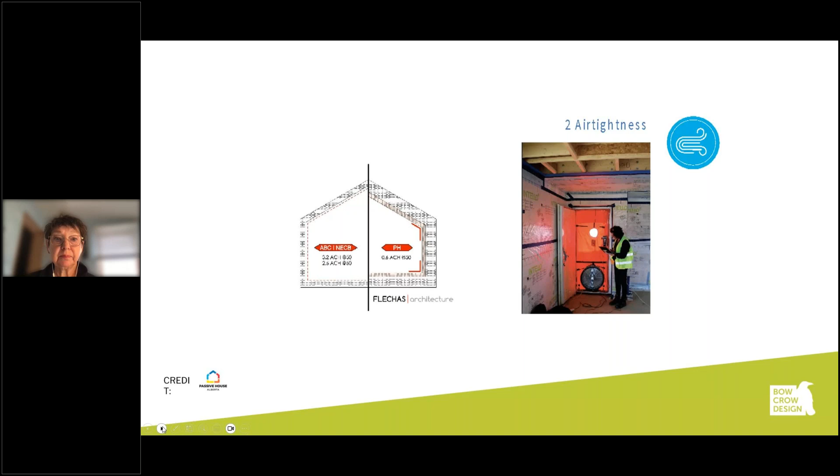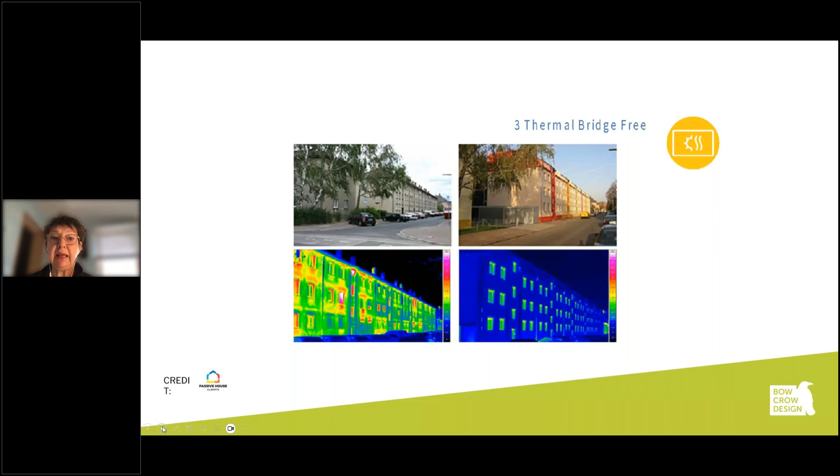We work on thermal bridge-free construction, meaning warm parts of the building are not sticking through to the outside. This is a thermograph image of the same building before and after a retrofit, where at the beginning there was a lot of thermal bridging, and in the end, a lot less.

And we work on windows and doors being very good and appropriate for the climate that they're in.

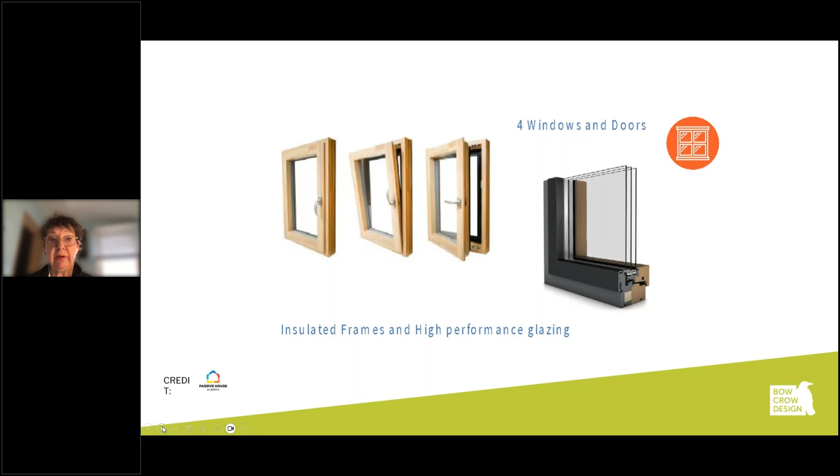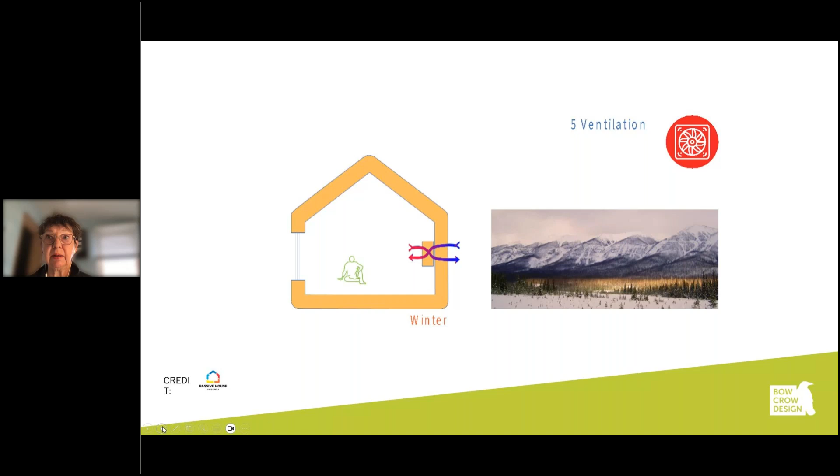We make sure that this airtight building has some active ventilation so that it provides fresh air for the inhabitants and a comfort level that is extremely healthy. All of these things work together to make a more comfortable building.

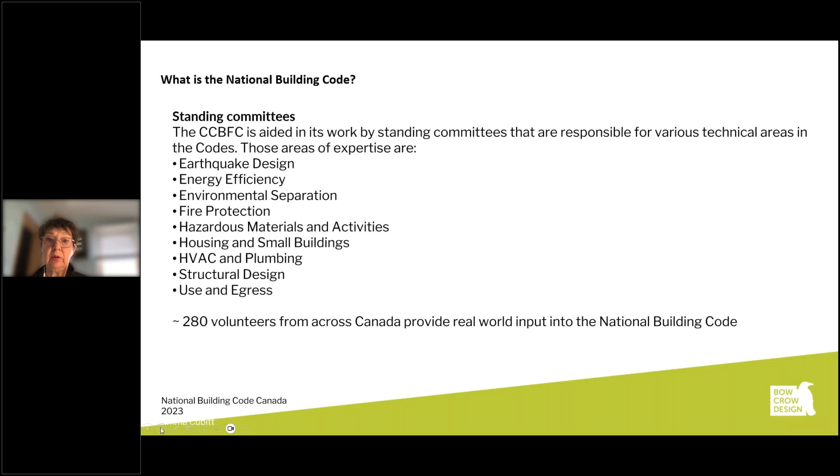The first building code was developed between 1939 and 1945, and it included not very many different aspects of building, but it was needed, and it was developed alongside international building codes at the time, understanding that there needed to be a basis for building around the world.

The most current document, issued in 2023, is about 1,570 pages, grown quite a bit, in 2 volumes with 8 parts - the first volume has 2 parts, and volume 2 has a couple of parts - plus appendices and indexes that are part of the whole building code document. It is not a simple document to go through.

But it forms the basis of most building design in the country, and the idea is that we would have a building code that's consistent across the country.

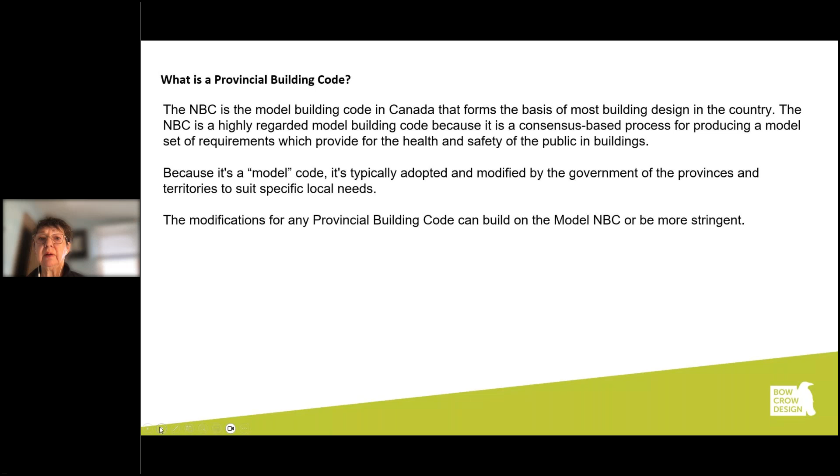Each province is required to adopt the current building code in Canada, and they are allowed to take that model code and, as a province, add to it and create their own building code, which is at the very least the same as the model building code, but must be more stringent in any additions.

One thing I forgot to mention, and I think I brought that to attention in one of the slides earlier, the National Building Code of Canada and also the NECB are minimum codes. In other words, you can't build to a lesser quality than what's described in the National Building Code or the National Energy Code for buildings.

So now we're going to talk about the history of the National Energy Code. It is not new, although a lot of people don't know much about it, but it's been developed since the 1970s, back when we thought we were going to run out of oil. Not that we were using too much oil, but that we were going to run out.

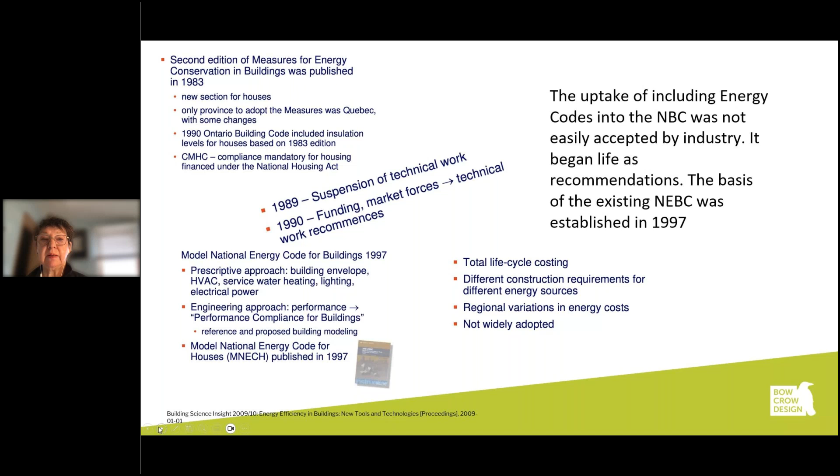The uptake of the energy codes was not really wanted or accepted by industry, and it had a lot of hiccups. The basis of the existing National Energy Code for Buildings was established in 1997, so that's a few years ago.

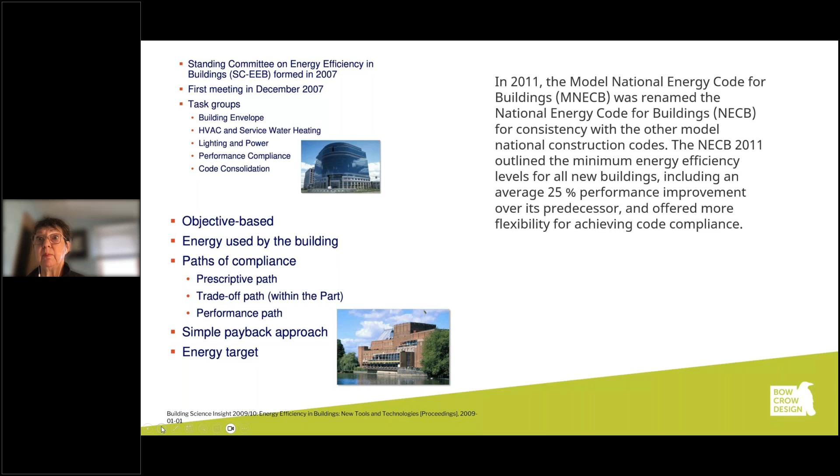The 2011 Model National Energy Code for Buildings was renamed and shortened to the National Energy Code for Buildings for consistency with other model national construction codes. The 2011 code was intended to be 25% better than the code before it, but it was still not enforced. It was offered as something that could be used as a model.

In 2015, there were 90 new changes. The idea of the 2015 NECB was that the efficiency measures explained and laid out in it are 10 to 14% more efficient, with the aim of helping to reduce energy consumption, save on energy bills, and reduce peak energy demand, which many people have heard about. Peak energy demand is the thing we fear the most for electrification.

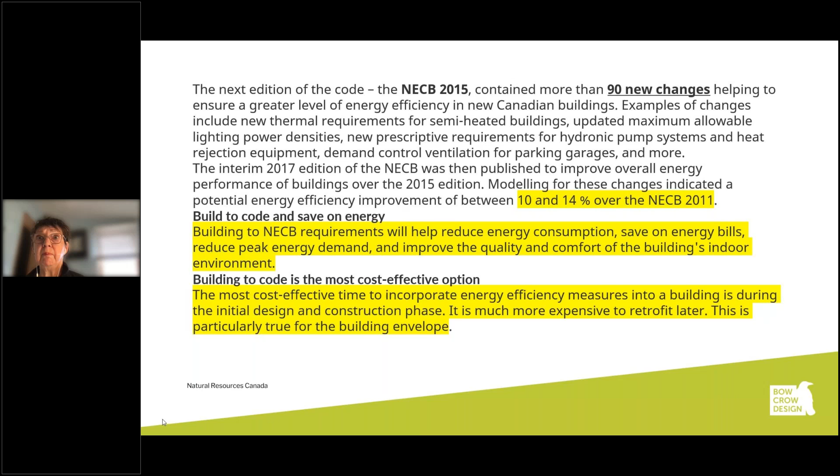The idea is that we want to be sure that buildings are not the source of energy failures in our provinces and in our country. The most cost-effective time to incorporate these energy efficient measures is when you're building a building, not later. This is particularly true in terms of the building envelope. Once you put a building up, it's pretty unlikely you're going to make any significant changes over many years, decades likely.

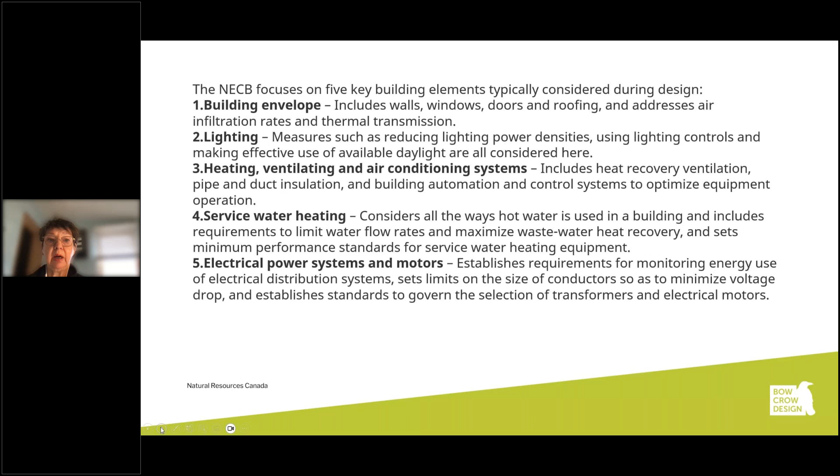So the NECB, what is it exactly? It focuses on five components: the building envelope, lighting, heating, ventilation, and air conditioning systems, service water heating, and electrical power systems and motors.

The 2020 edition has an addition to the Energy Code that is something new-ish. The province of BC has certainly been working on this for the last 10 or 15 years, but the new code is establishing tiers that will be developed over time.

Tier 1 is where the National Building Code or the National Energy Code is at this moment, but the next version will be at Tier 2, 25% more efficient over the target of Tier 1. Tier 3 will be 50% over the baseline target, and Tier 4 will be a 60% improvement over the baseline target.

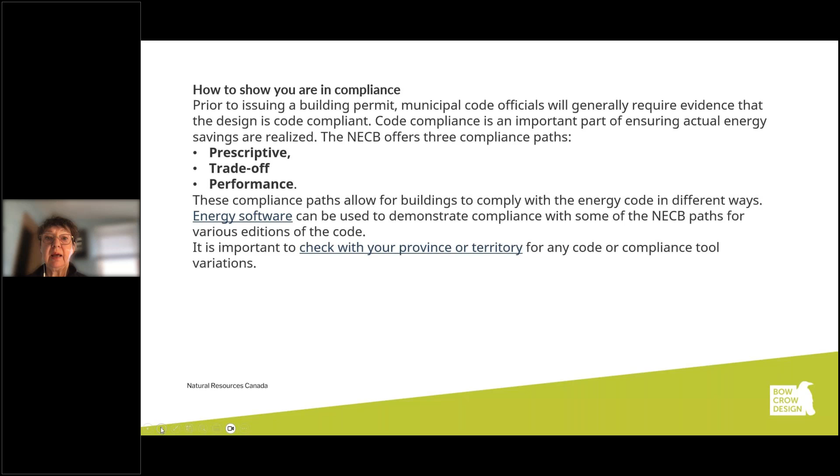The ways that you show you're in compliance to the jurisdiction when doing a building permit or designing a building come in three ways: prescriptive, trade-off, or performance. Proof of these is required for building permits across Canada.

In terms of code harmonization, the adoption of the National Building Code and the National Energy Code for Buildings is important. It's important that all provinces adopt and enforce these codes to ensure there are no particular benefits to building worse in any particular location in Canada, and that it prevents inconsistent model code adaptations, which can lead to barriers to trade, investment, and labor mobility within Canada. That's why harmonization of the codes across Canada, and the consistency, is important.

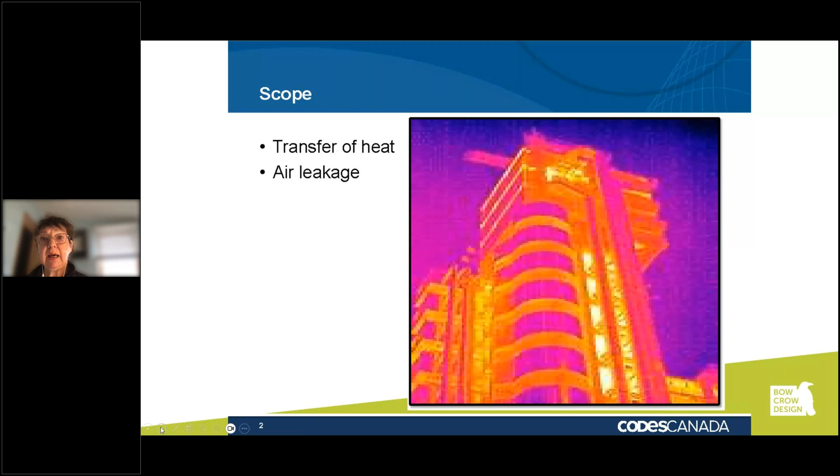So building envelope - remember we talked early on about thermal bridge modeling, thinking about the transfer of heat and air leakage from the building to the outside. The way we do this is by thinking of the means of separating components in the conditioned space from the unconditioned space and the exterior air and ground, ensuring that the condition temperatures are differing by more than 10 degrees Celsius at design conditions.

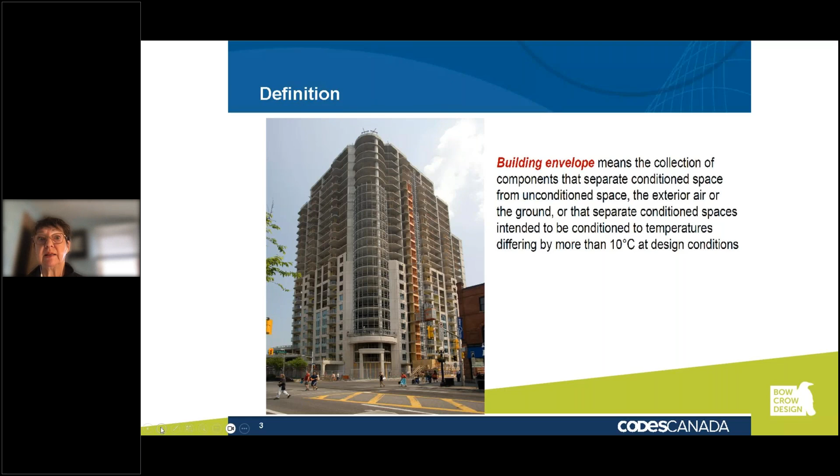That building, by the way, is a pretty poor example of a good building envelope. The compliance options are prescriptive.

There's a prescriptive path, which is usually a checklist, where you're just making sure that your building complies with the things on the list. Sometimes that's not good enough, or you want to try something new, or you have predetermined equipment - in that case you use a trade-off path, and there are tools provided by NRCan for the calculations. The last way is a performance path, whole building modeling, where you think about the whole building as a whole. That requires energy modeling, and that's where you can tweak the performance of the building so it meets the requirements of the NECB through unique building structures, unique equipment, and unique building methods.

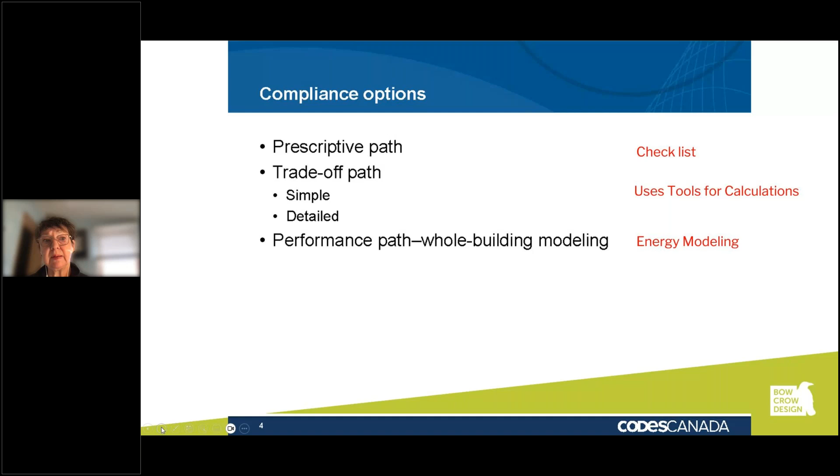So one big deal in terms of building envelope is the continuity of insulation. It's not just insulation, but making sure that insulation is continuous.

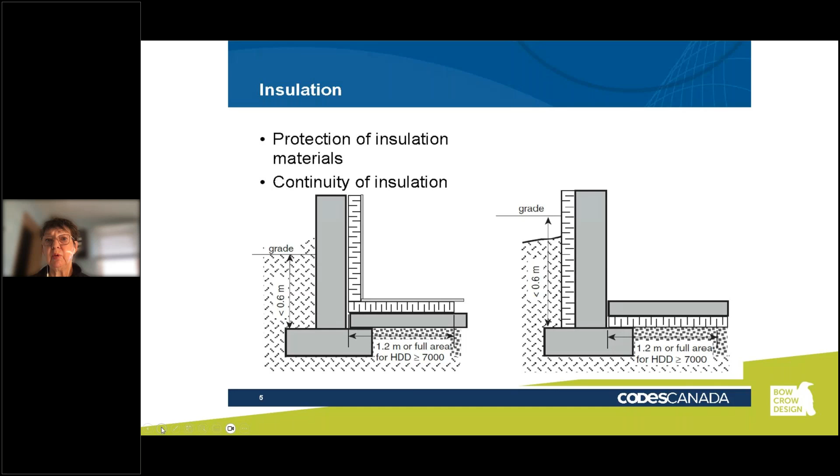In this slide, the first example shows continuity of insulation, where insulation is continuously in the same location and is protecting the outside of the building from environmental forces. In the second example, which might seem like the same thing, it is not, because there's a disconnect between the insulation and the ground and the outside. So there's some protection, but there's also heat being lost to the ground in this case, and through the stem wall and footing.

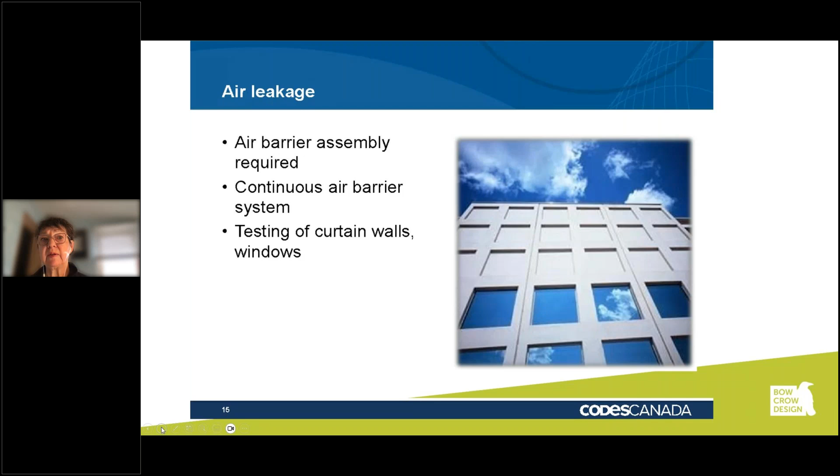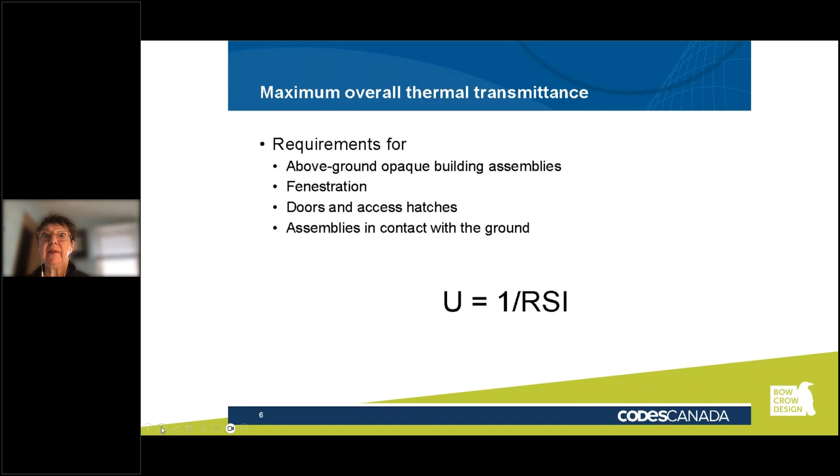Something that's used often in the building code is called a U value, which is pretty confusing. We all really know what an R value is - RSI is the metric version of R, and you can get a U value in imperial or a U value in metric. But if we know the RSI of a product, we can get the U value by dividing 1 by the RSI value.

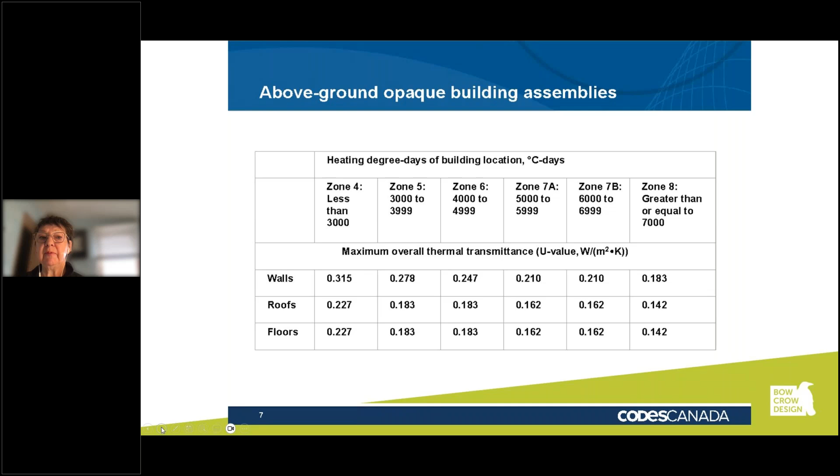So that's just so you can look at this chart and say, what is this? What is a U value and what is watts per meter squared Kelvin? We don't really know - you don't have to know, you can do a little bit of math to figure this out, I guess. But what we have here laid out for many components of the building is what's required from zone to zone in Canada.

For where I am right now, that's zone 7A, which is most of Canada. Some parts of Canada are in zone 4, not very much, but there's a lot of people living there. Zone 5 and 6 cover some of the southern parts of Canada, but most of Canada is zone 7A, 7B, and zone 8.

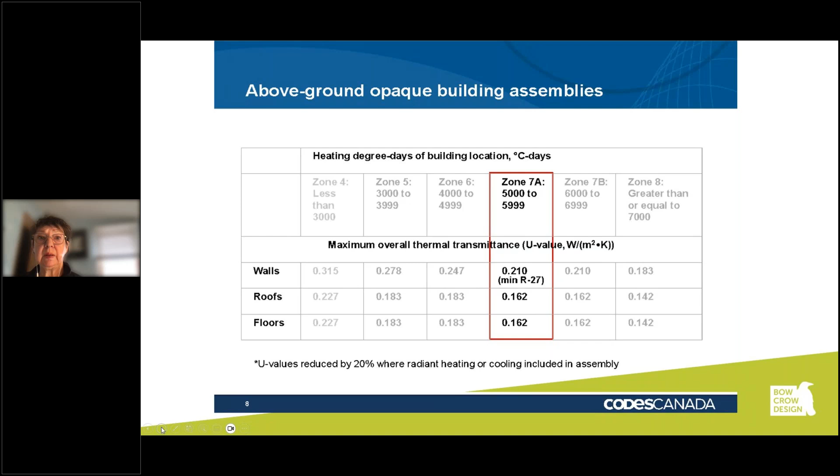The degree days is another term that's used, meaning the number of heating days that require heating. That is used universally as something that identifies what kind of zone the building is in.

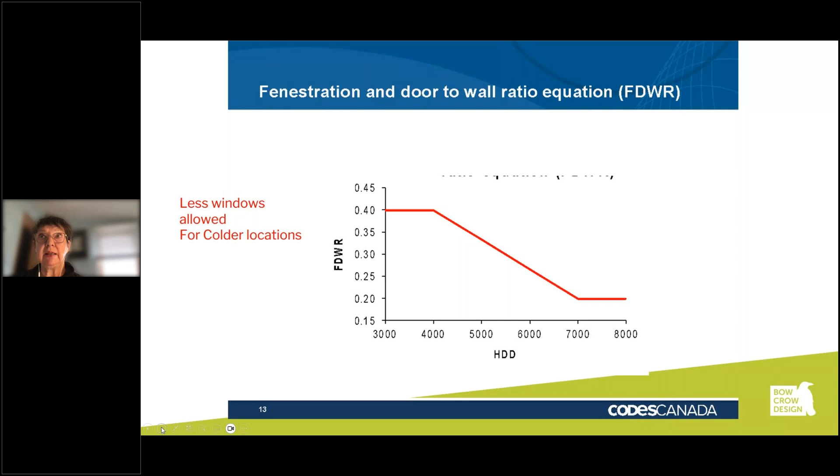Next, this is about fenestration - by the way, fenestration is another fancy word for glass or windows. In the National Energy Code, there is a requirement to have fewer windows in a colder environment. So heating degree days is at the bottom, and the number of windows allowed in the building, as a percentage, is lessened as we get into colder climates, according to the Energy Code.

So the lighting portion of the NECB is the next thing that we're going to look at.

The interior lighting is calculated, and there are two methods for figuring that out.

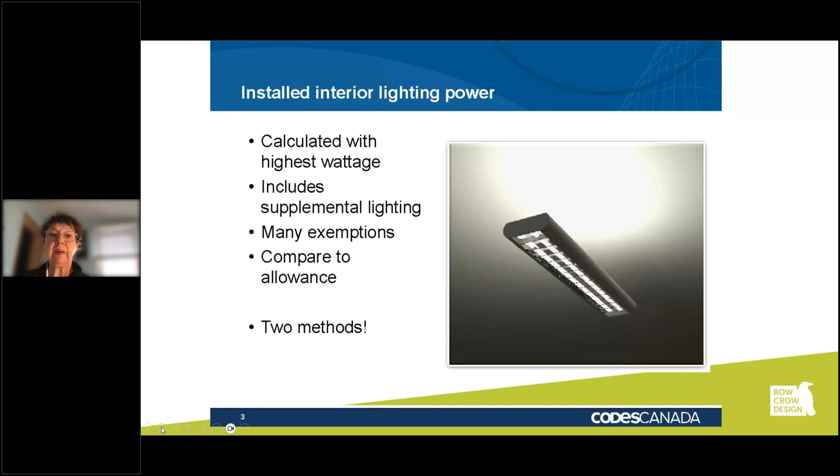That's either by building area or space by space. When considering how to meet the code requirements, sometimes space by space will make more sense in targeting lighting levels, but building area may actually make more sense for a larger building.

There are lighting tables and tools for figuring all of this out.

The scope for electrical systems isn't just about lighting. It's about all of the mechanical systems in a building, including the thermostats, pumps, heat pumps, and blowers. All of the equipment is calculated within the electrical energy used in the building.

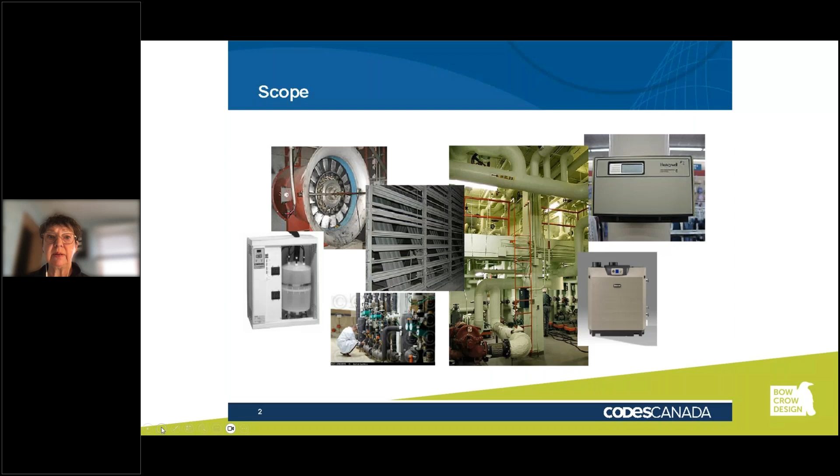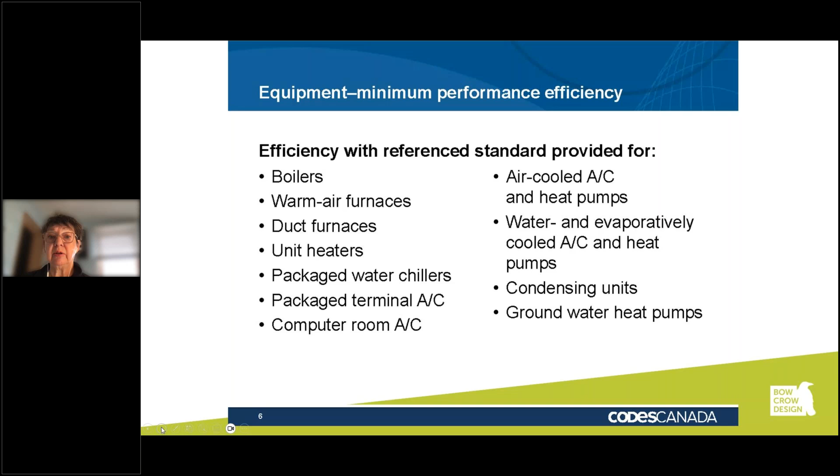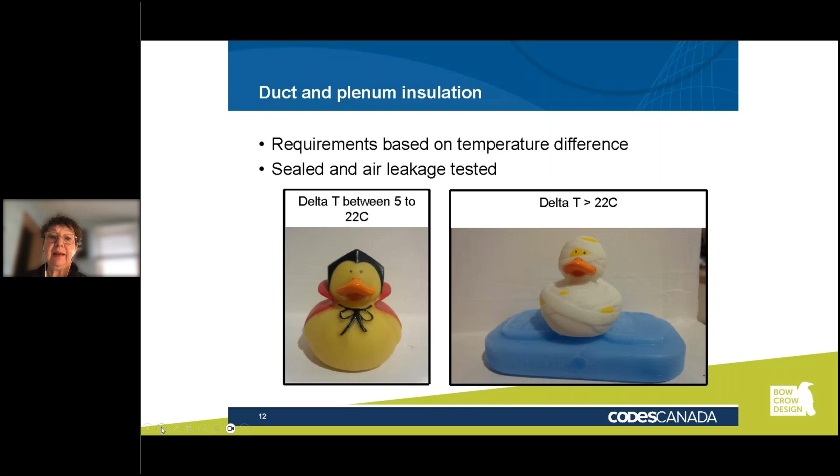With the trade-off concept, it still considers energy used throughout the system, and the tools used for the trade-off concept do include those considerations.

The system efficiency approach considers the HVAC system as a whole and is intended to permit flexibility for typical designs. It will compare against the total reference system.

In the code, a reference building is a building that's built to the previous code. What the efficiency needs to do is be better than that reference system, based on the tiered code: 25%, 50%, 60% better.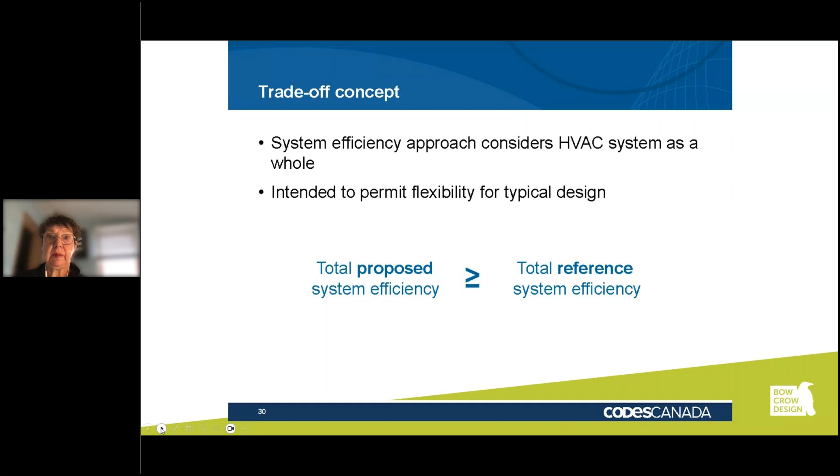We're limited in the energy sources that can be used in the energy code. Diesel is not included. The backup equipment has to meet the prescriptive requirements.

So you can't just have some small or undersized equipment that's backed up with something that is bigger and less efficient.

The equipment performance efficiency will comply with the energy efficiency regulations, and the backup equipment must comply with the prescriptive path. The prescriptive path is one of the ways of checking for the efficiency of the building, and you can also use the performance path as well.

This is the national energy code for hot water systems.

Again, this is about the proposed efficiency being better than the reference, and that is consistent through the entire code. These are some of the things we would be looking for in terms of hot water efficiency.

In the trade-off, sometimes more efficient equipment can be used as a trade-off for less efficient equipment, and you are obliged to use the tools in order to figure that out.

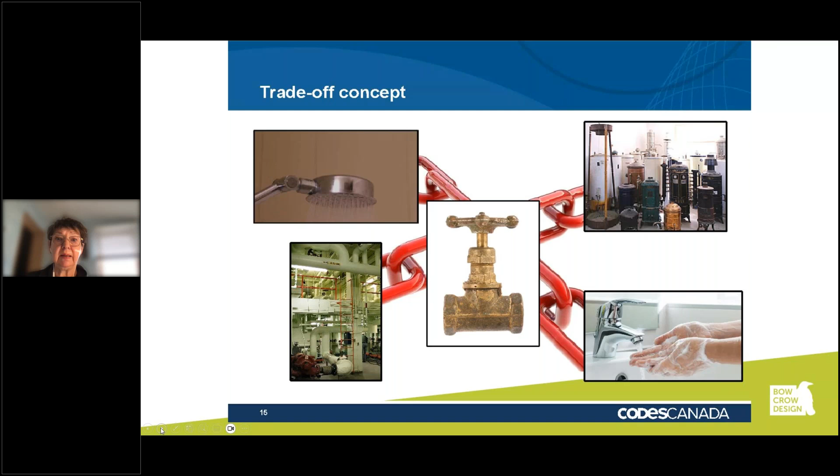For power systems, the electrical power systems that are outside are also considered as part of the whole building.

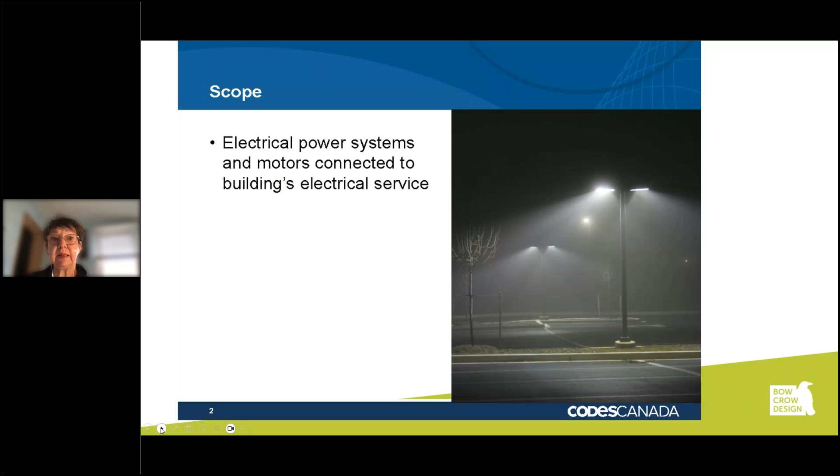For the power systems, you're not allowed to use the trade-off tools. It's just either the prescriptive path or the performance compliance.

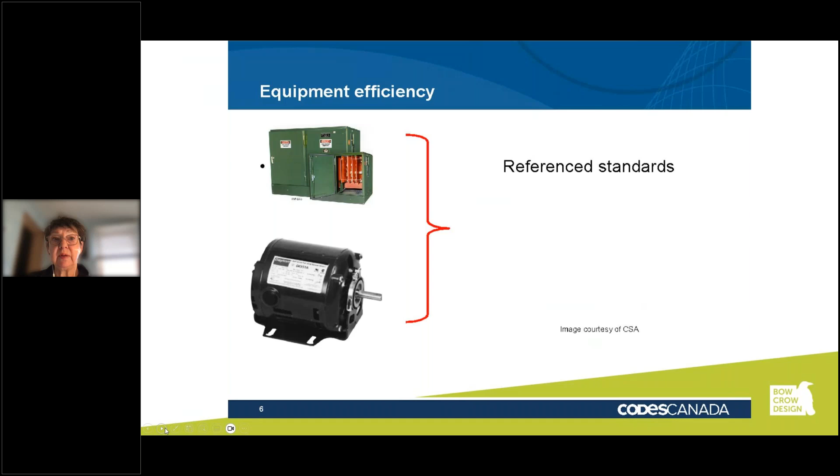Part 8 of the NECB is an outline for the building performance path.

It is the part of the code, of the National Energy Code, that you use to come up with ways of using a building performance overall, looking at the building as a whole, in lieu of trade-off or prescriptive paths. So that's a whole building energy use comparison.

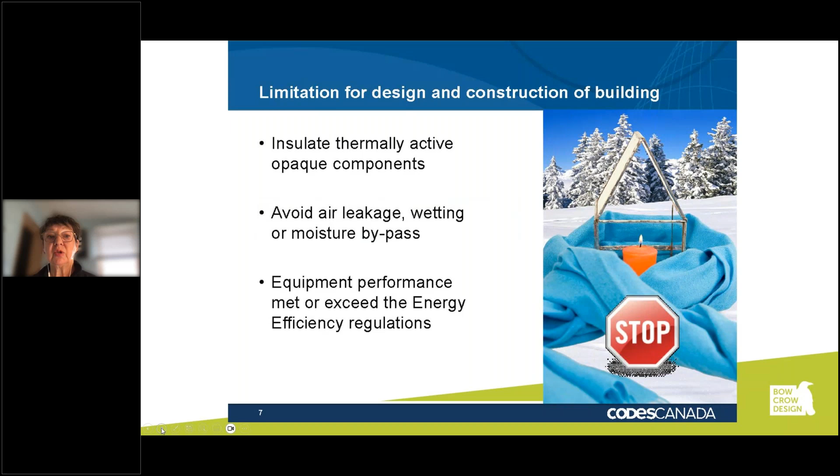So just an overview of what's required in the NECB: to insulate thermally active opaque components, meaning anything that's solid needs to be insulated well to make the building airtight, and to be sure that equipment performance meets or exceeds the energy efficiency regulations.

The tiered energy code is new in the 2020 edition. This is about tiered performance. So in Alberta, right now, the performance is at Tier 1. But in Saskatchewan, it's at Tier 2. And in British Columbia, it's at Tier 3.

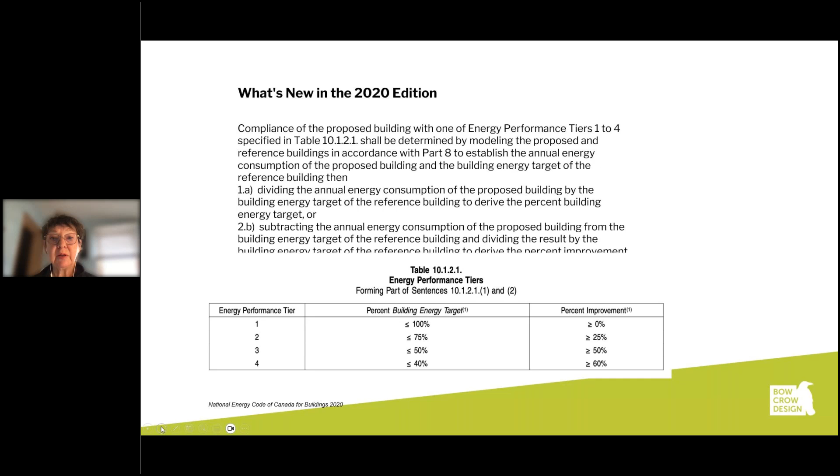The targets for compliance 1 to 4 are specified in 10.1.2.1 and will be determined by modeling the proposed and reference buildings. The reference building is the lowest possible denominator, and to be at Tier 1, you're still building at the lowest common denominator. At Tier 2, you're building at 25% better, etc.

So 9.36 is for small buildings. All of the stuff we talked about earlier is for Part 3 buildings, commercial buildings, or bigger buildings, typically bigger than 6,000 square feet. 9.36 can apply to commercial buildings or small multifamily buildings, but it's generally smaller buildings and most often residential.

The difference in the relationship with 9.36 is that it is tied completely, all of the same rules apply, except the lighting requirements are not the same. There are no lighting requirements for 9.36.

As stated earlier, these are the tiers that 2020 has included. Some things to consider for smaller buildings going forward: more efficient windows, doors, and skylights are going to be required. Minimum performance for heating and cooling equipment is required. Professional calculation for heating and cooling for residential buildings, which has never been required before, will be required.

An air tightness minimum of 2.5 ACH at 50 pascals, new set points for indoor air temperature for energy modeling, and new hot water usage numbers for energy modeling, and the tiered energy code. So every province can elect to be at whichever tier they want at this point. And as time goes on, the next building code, it'll be the next tier, and the next building code after that, the next tier.

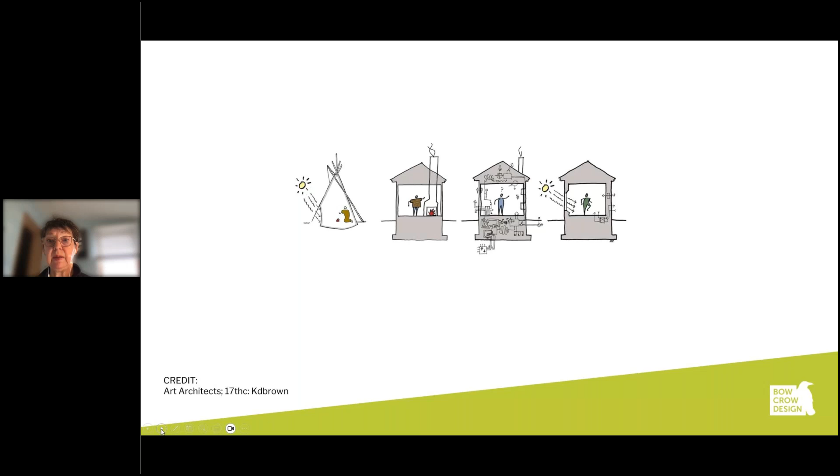It's a big change, a big way of change in thinking. But by making these changes and doing them incrementally over time, people are getting more used to the idea of incorporating these changes. Building stock will not be the third largest emitter of GHG emissions in Canada.

By the way, they're bigger emitters than all of the gas vehicles in Canada. How can the NECB benefit the Indigenous communities and associations, communities, and infrastructure projects? So this is where we were headed for this presentation.

So in my mind, sustainability is part of two-eyed seeing, and what that means is that both cultures are meeting together, and the meeting together part is where the realization is that you can't just impose things on the environment, you can't just impose things on people and expect that to work out. Thinking about buildings as a whole, and thinking about their place on the planet, and thinking about their impact now and their impact in the future, is an Indigenous way of thinking of anything.

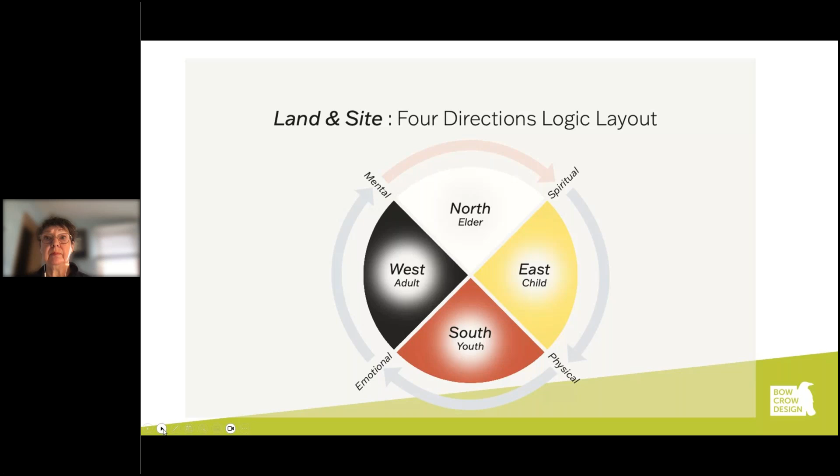Low carbon materials and natural materials are something that is not enforced and not really mentioned in the Energy Code now, but they are something we will be considering and have to consider going forward, because building buildings using a lot of high GHG materials, or materials that have a huge embodied carbon or upfront carbon, that use a lot of energy to be manufactured and are not recyclable and are harmful to the environment, is not improving the building stock.

In some cases, buildings using materials that are harmful to the environment actually use more energy in the construction of the building than they'll ever save in their lifetime. And this also is an Indigenous way of thinking, of using local and natural materials.

So in the end, as these codes are enforced and as they are required to be enforced, what will happen is that buildings across Canada, but most importantly for Indigenous communities, will be comfortable, healthy, resilient, a refuge, and built to last centuries and not just a couple of years.

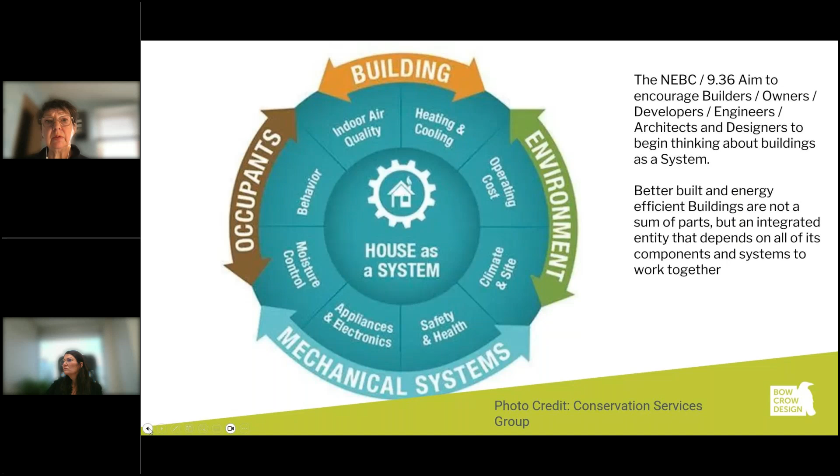Absolutely. And I don't know, Danielle, we can go back on some slides, kind of in the middle of the slide deck. So the Energy Code absolutely considers... back farther into the technical part in the middle of the deck, yeah, keep going back a little farther. I think near, getting there, aren't we? Near where we were talking about the building envelope. For every one of these parts of the NECB, the climate zone is considered.

And there, we can stop here first. Okay, perfect, because the climate zones are indicated and they're well known, and the requirements for each one of the zones has specific requirements. Let's go back one, Danielle. I think that'll show us when we're farther back. Yeah, there we go.

So for windows, for instance, this is just an example. For each one of these zones, the windows need to perform better as the climate gets colder. So the degree days go up, the efficiency of the window goes up as well. So these are minimum requirements, and I can't say that often enough, because the building code and the National Energy Code are good, they're world class, but they also are a minimum code.

And what that means is that's the top level that most people, most developers, most builders build to, is the building code, and they may actually quote to you saying this is built to code standards. But that's where the ceiling is the minimum amount. When we can do better, and that's where the tiered code comes in. Considering that by 2035 the tiered code will bring requirements up to tier 4, then why would I be building at minimum code right now? Why wouldn't I be building to tier 4 as a forward thinking builder or developer, so that my building is resilient and better performing in the climate it's designed for?

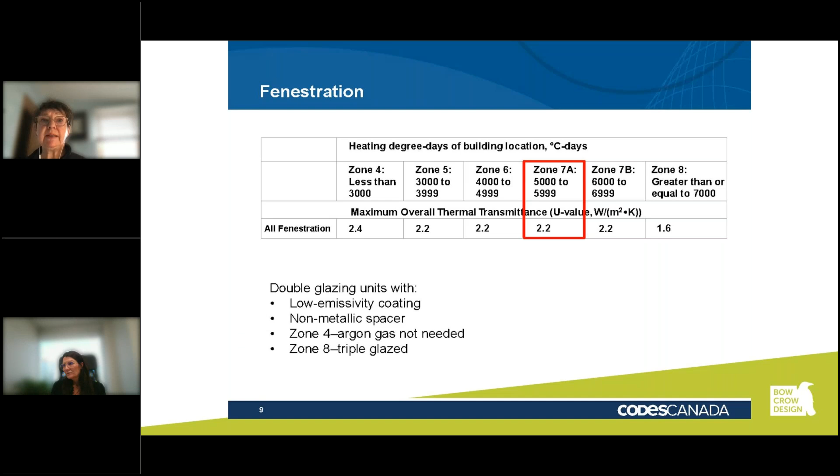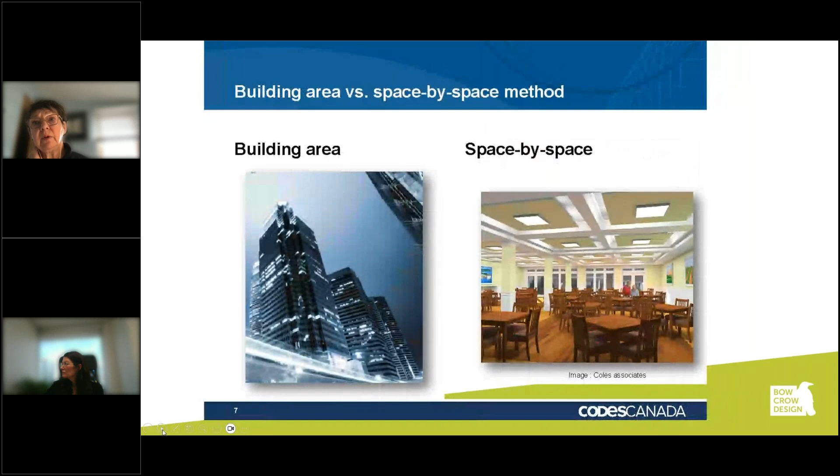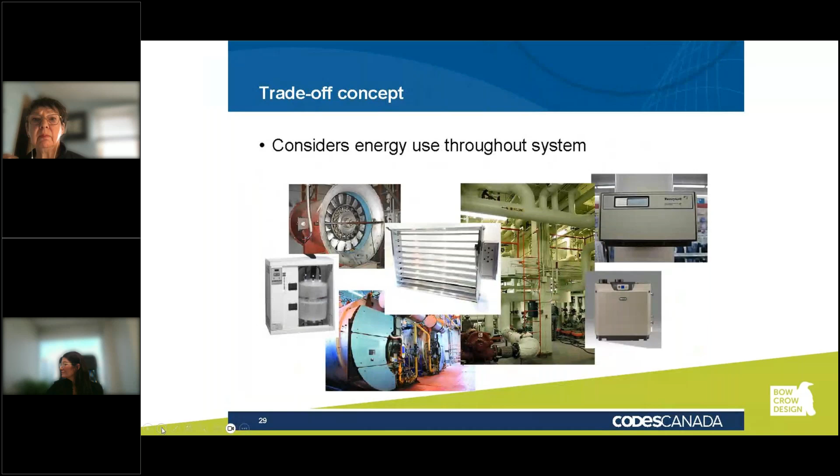So in the presentation, we can go back towards the end if you want, Danielle. It mentioned that buildings themselves contribute a significant amount of greenhouse gas to the environment in Canada especially. We really rely a lot on fossil fuels to heat and cool our homes, and much of the building stock that's existing was never built with energy efficiency in mind. It was built with the idea that we have a lot of cheap gas and oil, and we can just keep throwing heat at this, and that will be the way that we survive in the cold. And the same goes for cooling systems.

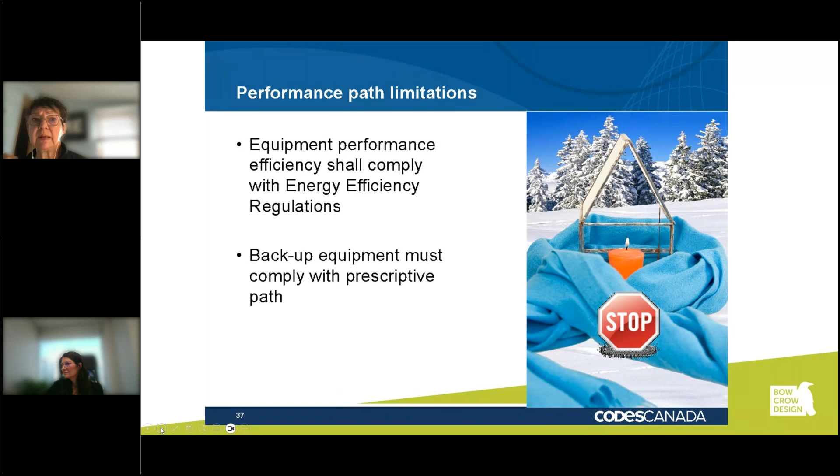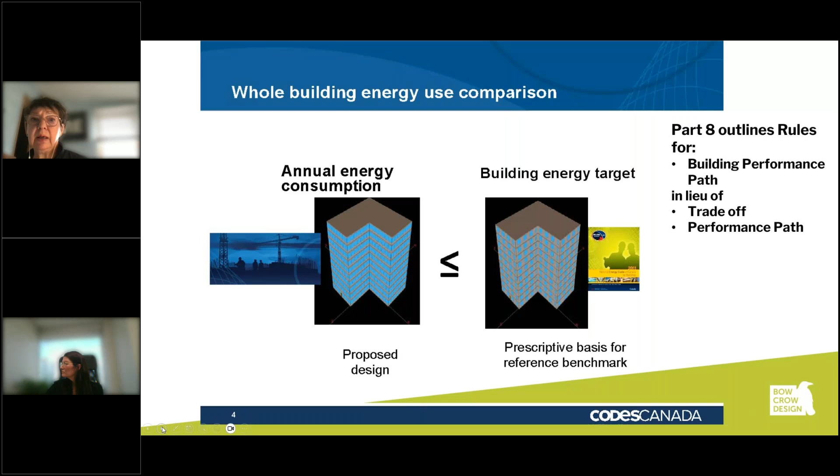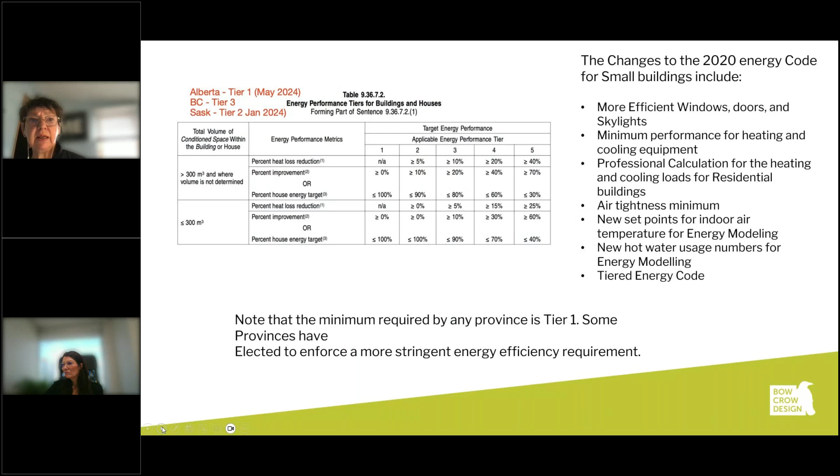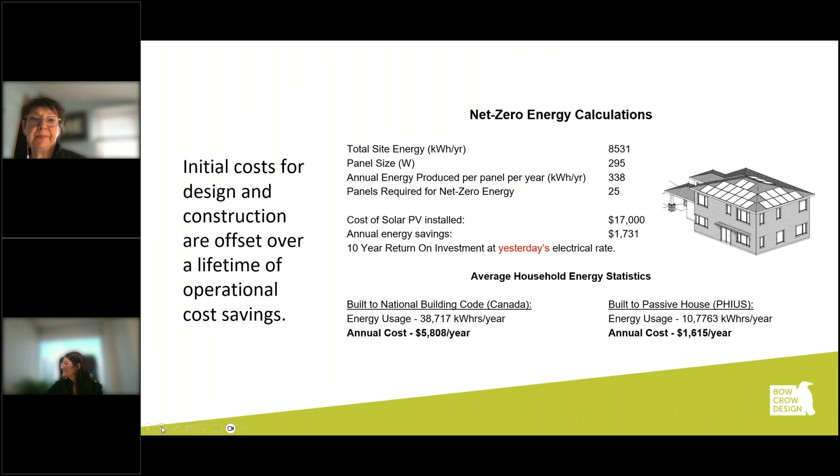But I think a couple more slides, Danielle. Oh yeah, quite a bit farther. The way that these codes will help is that by the time buildings are 60% more efficient than they are today, and the new building stock is showing that efficiency, it will make such a difference in terms of overall operational costs as time goes on. I think it's the next slide.

Next slide. Yes, there it is right there. That was the one before. Oh, the one before, two before this one.

The real benefit to all of this is that not only will we reduce the greenhouse gas emissions by making buildings more efficient, the buildings end up being more comfortable, nicer to be in, quieter, and healthier inside. The VOCs are taken care of by good ventilation. VOCs are any of the things that are off-gassing in your house. We can deal with smoke and still have fresh air with proper ventilation and proper filters. And we can be sure that our energy costs are lower and lower.

So one big deal about electrification is electricity is not cheap, we know that. So when we're thinking about electrification and efficient electrical equipment, we still need to reduce the requirements for heating and cooling for the buildings in order to make it viable. So they have to go hand in hand, and this is still whole building thinking in order for that to be accomplished.